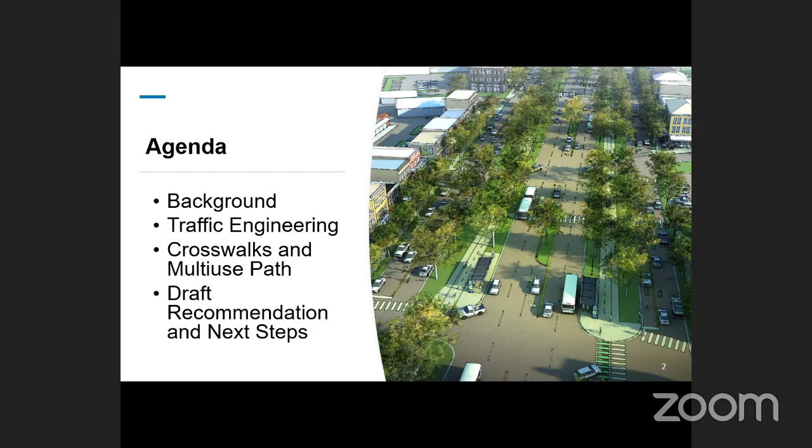And we spent the last several months working very closely with NCDOT, who, as you all know, owns this infrastructure. And anything that we do within this corridor requires their concurrence. So we've been working closely with them to get concurrence on our next steps. We'll talk a little bit about the crosswalks and the multi-use path that will be implemented as part of this project. And then, as the manager mentioned, while tonight we're just sharing information to get some feedback, we do plan to return to a June council meeting and ask for concurrence on a draft recommendation. And we're going to share that recommendation with you this evening.

So just as a reminder for this project, this is one that we've been working on for some time. It originated in 2011 when the alternatives analysis was initially approved. In 2012, the Chapel Hill 2020 plan was adopted and included the NSBRT project in that. The original locally preferred alternative was approved by council in April of 2016. And then we were approved to enter into project development, which is the first step in the federal funding process, in November of 2016. In January of 2019, council adopted an updated LPA.

The Federal Transit Administration, or FTA, reviewed that in February of 2019, and they asked us at that point in time to identify a final LPA. And what they meant by that is that the LPA that was originally adopted said there was a convert or construct option in several sections of the corridor, and they need us to confirm whether we're going to convert or construct or a combination of both. We need to tell them what that is before we can continue to move forward in the federal process.

So in October of 2019, we provided an update to council, as I mentioned earlier. You all had some questions, and we're prepared to address those this evening. And then in February of 2020, FTA released their new starts, small starts ratings, and our project, along with the project in Raleigh, were rated, and we received a medium rating, which allows us to continue in the FTA funding process. So just a reminder of the context and vision is why we're undertaking this project and why we've been working on it for 9 years now.

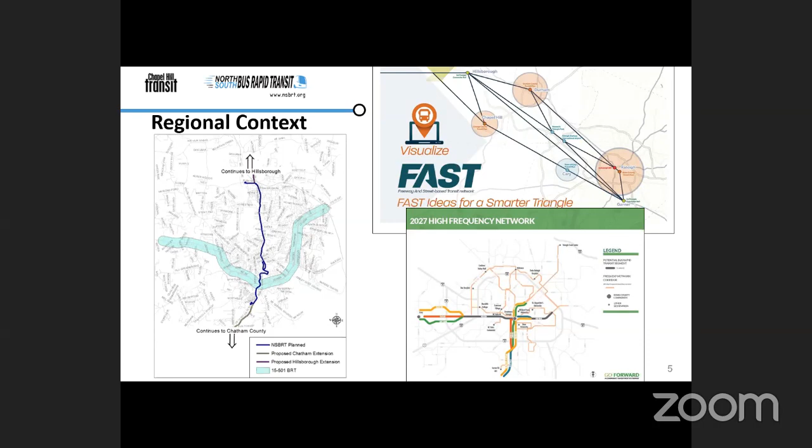Until we have the LPA, we've paused that work because we don't want to spend a whole lot of time working on those things until we have a defined LPA and we know that FTA accepts that LPA. So we don't think it makes sense to spend a lot of resources working on that until we have concurrence from FTA on our final LPA. Once that happens, then we potentially could move into engineering, and once we moved into that, we potentially would be at a place where we could compete for some funding that would be available, as the mayor mentioned earlier, for shovel-ready type projects. So we're about a step away from where that's at.

Under the current scenario, and this all could change, both because of funding at the federal and state level, but our earliest construction would begin 2023 with potential implementation in 2027. Again, that's assuming a traditional funding approach. If we become eligible for and additional stimulus money becomes available, that could potentially be expedited. But as of now, we're looking at 2027 before we implement our first BRT line.

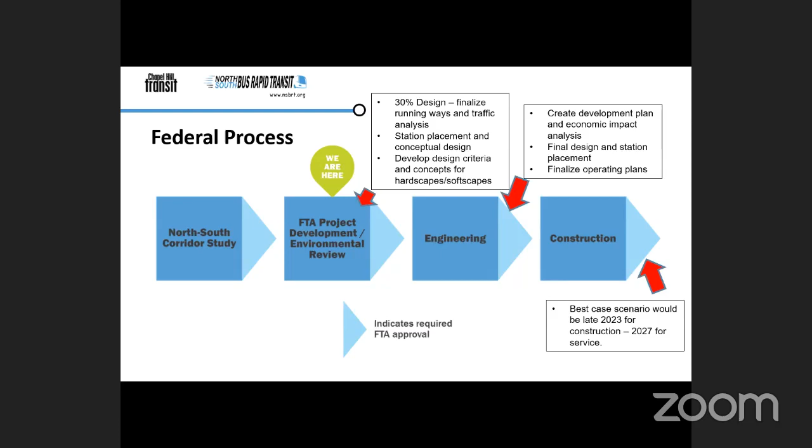So the locally preferred alternative, again, just want to share some context in this regard. It's a general description of the type of transit service that will be used within the corridor. So in this case, bus rapid transit, that's been decided, and there's been consensus on that for some time. The running ways are identified. We've had previous conversations over the years about, should we be center running or curb running or median running? We've identified and selected the curb running for the corridor. What's left to be determined is, are we going to construct lanes or are we going to convert lanes? It also includes the alignment and then the beginning and the end of the route.

As an important reminder, the LPA is general. So specifics, such as specific locations for stations and engineering and those sort of things, happen as we move into engineering and future planning phases. So while we've got a general sense of where the stations will be at, they are nowhere near locked in at this point in time. The LPA is important because it's a critical step in the funding process. It tells the Federal Transit Administration what alternative we're going to be pursuing as we pursue local, regional, and federal funding. And importantly, it can be adjusted through the environmental or NEPA phase and also through the design phases.

So for example, if we decided, as we have, that downtown would be a dedicated convert option. As we go through engineering or the environmental engineering, and we decide as a community and as a council, well, the convert option just isn't going to work through downtown. As long as we haven't made a submission for federal funding, we can adjust that, and we can do that in other areas of the corridor as well. So again, I think we'll be talking through some of those options with you.

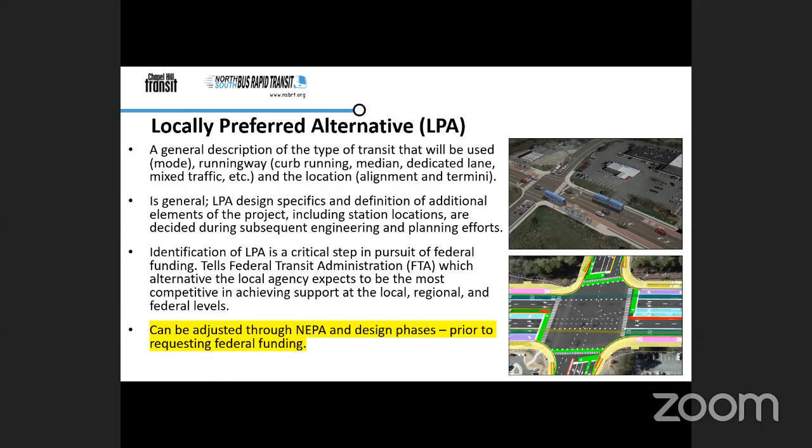So with that, our next steps for the LPA: the Transit Partners Committee has approved the updated LPA that we'll be hearing about tonight. We'll have the presentation this evening, and then we plan to return either to the June 10th session or the June 24th session of council to seek final approval of the LPA.

So with that, I will turn it over to Kevin Bauman with Kimley Horn, who is our traffic engineer. He'll provide an update on the traffic engineering, and then following him, Julius Superock with AECOM will talk with you about the pedestrian and bicycle infrastructure, and then I'll return with a quick update on the final LPA. So with that, I'll turn it over to Kevin.

Thanks, Brian. Can you hear me? Yes, we can hear you.

Okay, wonderful. All right, so we're going to start our traffic discussion with a quick recap of the information we've shared previously, and talk through the areas of the corridor where we have been evaluating alternatives and really just share what we found in terms of traffic impacts. And then lastly, we'll share some data we've collected related to the types of trips on this road and try to answer this question of whether folks on this road are primarily local or through trips.

So we've shared some of our analyses with this group previously. We looked at several different options for convert and construct on the corridor using both existing and future traffic. And based on those analyses, we're recommending to construct on the northern end of the corridor from Eubanks to the Umstead Drive area, as well as the southern end of the corridor from NC 54 down to Southern Village.

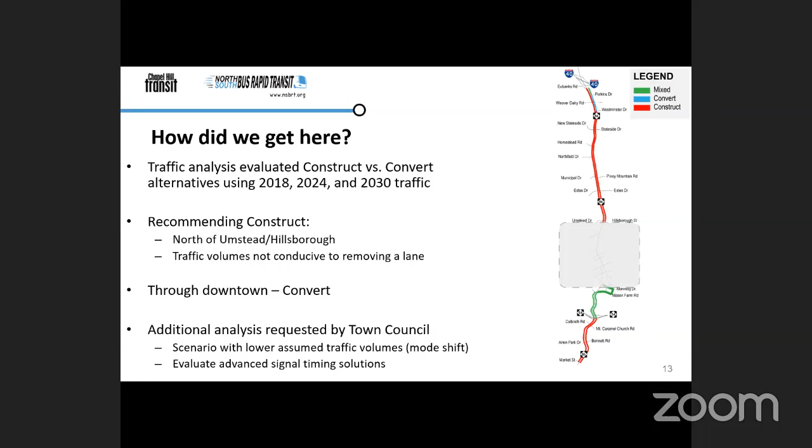One quick note relative to that picture I just showed you: there's one portion of the corridor in that northern area where we're actually proposing to convert an existing lane. That's because it currently has three northbound travel lanes and has enough capacity to handle that traffic with just two northbound travel lanes for vehicles plus a bus lane. So that's the one exception to the rule north of the Umstead Drive area where we are proposing to convert. Really that's just an effort to reduce the cross section of the road and also maintain uniformity in the cross section along that stretch.

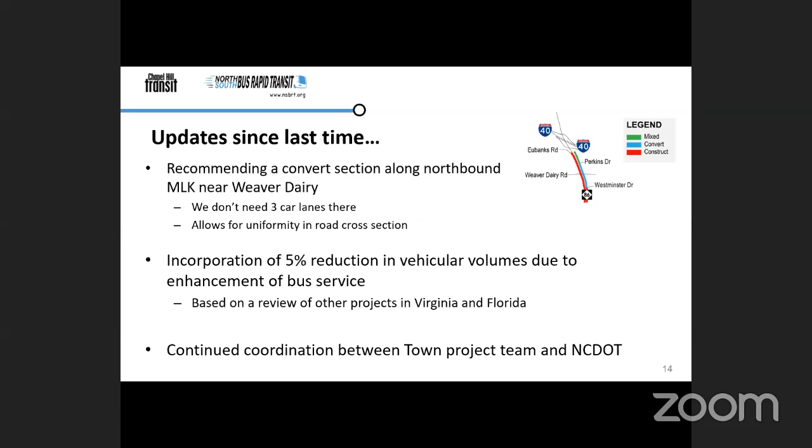Lastly, we've had a lot of regular coordination with NCDOT since we spoke with this group late last year. Their staff has been able to review all of our analysis and in general has concurred with the conclusions that we're going to be sharing today relative to these alternatives.

So for that gray box in the middle, we looked at three different options for the cross section in downtown, where the traffic volumes are lower and where it's really not feasible to increase the footprint of the road from an impacts standpoint.

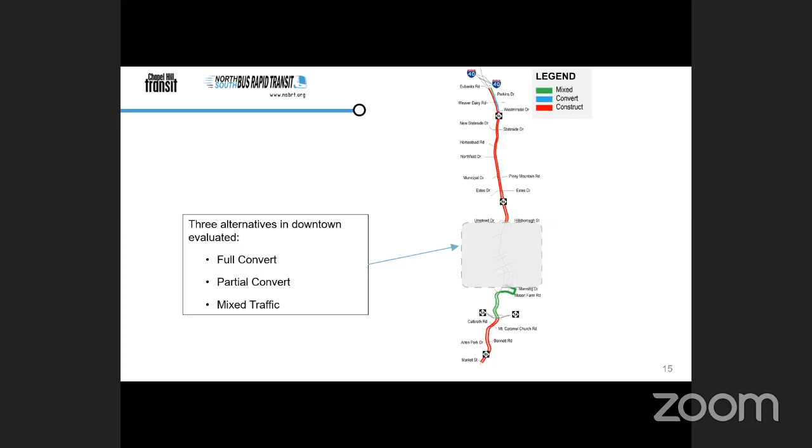We looked at two different convert options and one which would just have the bus operate in mixed traffic like it does today. The first alternative, which we're calling full convert, would convert a lane to bus-only along the entire stretch from Umstead Drive to Manning Drive near the UNC Hospital. The second alternative, which we're calling partial convert, is essentially the same as full convert, except for a section of mixed traffic operation in the vicinity of Cameron Avenue downtown.

So let's take a look at how the travel time numbers compare between these alternatives, starting with buses. Regardless of the downtown treatment chosen, there's a notable improvement projected for the buses over the current condition. There's not a substantial difference in travel time between the convert, partial convert, and mixed traffic options downtown from a bus perspective.

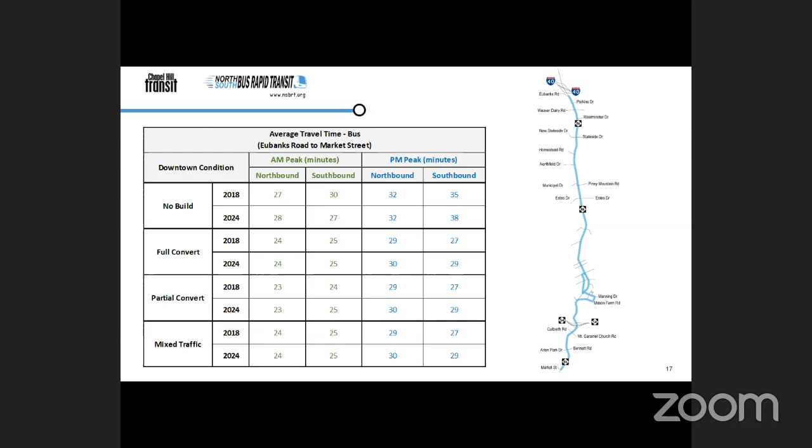Now, when you look at travel times for the general purpose vehicles, in general the travel times are comparable. You see a slight improvement in travel time for the mixed traffic scenario versus the two convert scenarios, which isn't a huge surprise. That difference of essentially keeping the lanes like they are today saves about a minute of travel time on average for cars through downtown—essentially the longer delays and queues you'd expect to see at those downtown intersections are adding about a minute of travel time on average.

Now, one of the many metrics we looked at in terms of expected vehicular operations is level of service. I'm sure many in this group are familiar, but the letter grades you see here in this table are just like school, where A is the best and F is the worst.

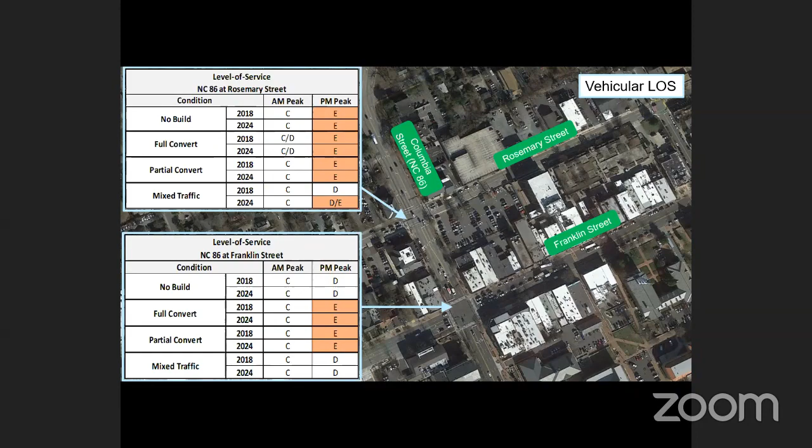Here's a look at how the level of service results compare between the alternatives at Rosemary and Franklin Street, those two intersections downtown. The boxes highlighted in orange are usually the letter grades we like to avoid, but as you probably know, there are certainly some intersections on this road that already operate in that orange range today. You can see that the two convert options are expected to create longer delays in general than just operating the bus in mixed traffic, but it's not a drastic enough difference in delay that we would be uncomfortable with recommending the convert as a viable option through this area.

One thing we did want to highlight is that if the town were to convert through downtown, this is the area with the greatest potential for some longer vehicular queues, really because this area would be reduced to a single lane. There is an existing pedestrian crossing near that blue arrow on the screen near Fraternity Court, which in this scenario, if we were to convert, has the potential to have some increased interactions with cars.

So back to the level of service information, this time down at Columbia and Cameron. You can see there's a more noticeable delay difference between the full convert and the other options. Taking the full convert would take that intersection from a level of service E today right to that kind of E/F range, right on the edge of those two thresholds.

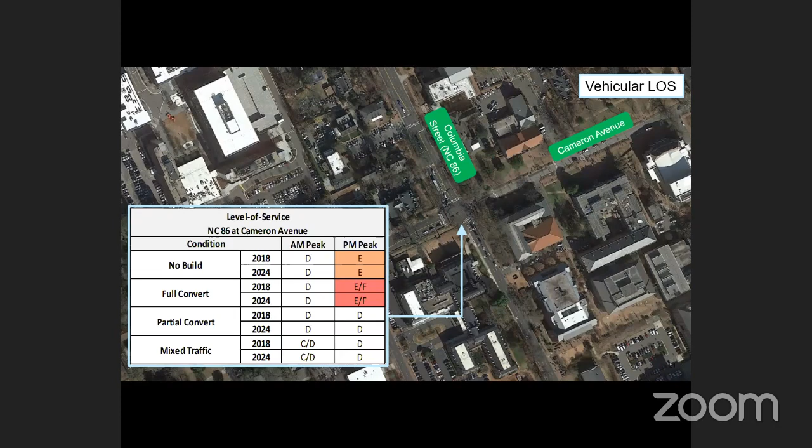The way the signal runs today, I'm sure for folks that have driven through this area, the first phase that happens is southbound Columbia Street goes, followed by northbound Columbia, indicated by the blue arrow on the picture, followed by the movements on Cameron Avenue, followed by an exclusive phase for pedestrians to cross in all directions.

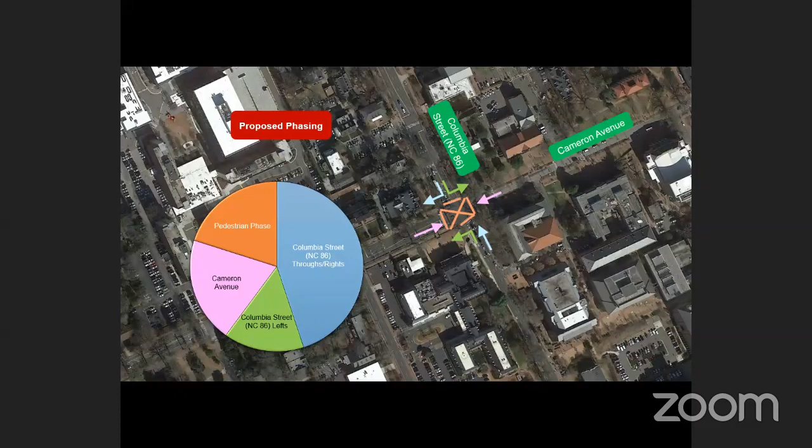So we would run those two movements together, followed by the left turns on Columbia Street, followed by the Cameron Avenue movements, and then followed by the pedestrian crossing, just like we have out there today.

So just to hit on the major takeaways downtown, we think either the convert options or mixed traffic could be viable choices from a traffic perspective, as long as some of those signal timing improvements I just talked about are incorporated into the design.

Ultimately, the final chosen alternative is something that has yet to be selected and really should be considered based on whether there's a strong preference to maintain that consistent cross section through downtown, and whether the town is comfortable with the drop-add nature of what the partial convert would bring to this project, as well as whether there's a preference to make operations slightly worse for vehicles for the sake of that benefit of the consistent cross section and having that consistent lane through downtown.

Because I'm sure many of y'all have driven through this area and experienced the challenge of driving in that rightmost lane today, where the buses are stopping pretty consistently through that area. It's really not a fully usable or utilized lane for vehicles, just because of how heavy and consistent the bus traffic is through that area. So the full convert would really be an attempt to clean that up, make it clear, and really delineate which lanes are intended to be used for buses and which lanes are intended to be used for vehicles.

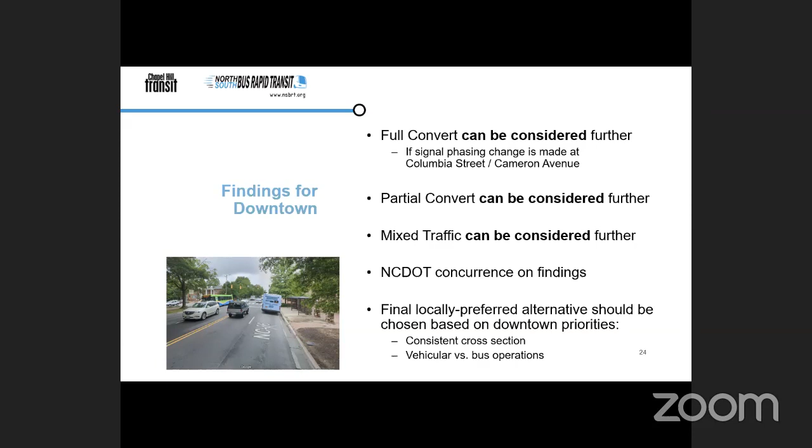Here's a concept of what an outside running bus lane might actually look like downtown. This is right at the intersection of Columbia and Rosemary. So just to get everybody oriented, in the top right corner of this photo where my cursor is, that would be north, and down here in the bottom left would be south. Franklin Street is just off the picture, on the left side.

Note that in situations where there isn't a right turn lane, folks making right turn movements will still make those movements from that outside lane. They would make a lane change movement to get over into the bus lane at the intersection and make a right turn. Now, for locations where there is an exclusive right turn lane, for example the southbound direction at Rosemary, vehicles would cross over the bus lane somewhere upstream and then make a right turn movement at the intersection, just like they do today.

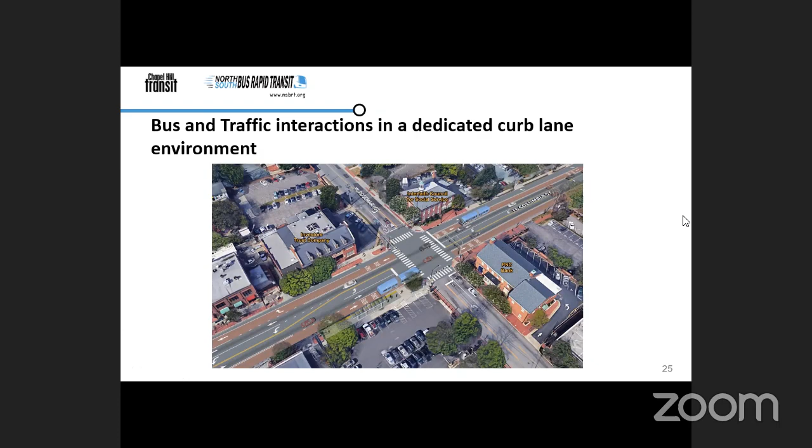Here's another example up at Hillsborough Street. This is kind of in that Midtown Market shopping center area.

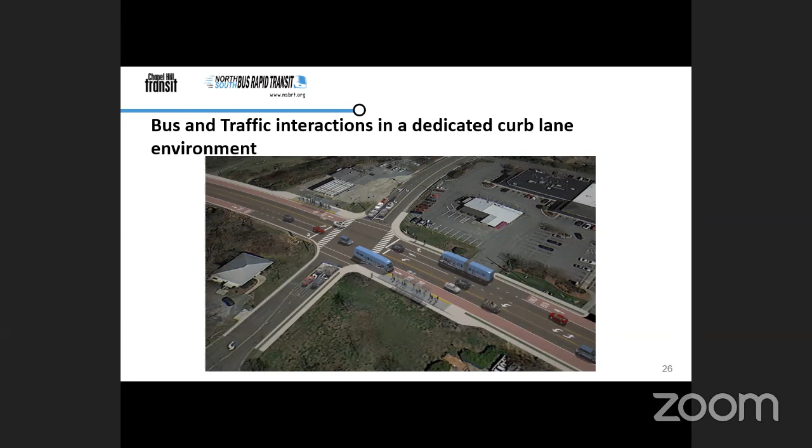All right, so let's switch gears a little bit and talk about some data that we collected on travel patterns in the area. The avenue that we chose to use for this was Streetlight. Streetlight uses location-based information from phones to give you information about travel patterns, and they buy it directly from the cell phone providers. We identified some locations along the MLK corridor, and we asked Streetlight to tell us about the destinations of folks that drive through certain spots. So it can help you figure out how far people drive on the corridor, as well as some key destinations for folks in the area.

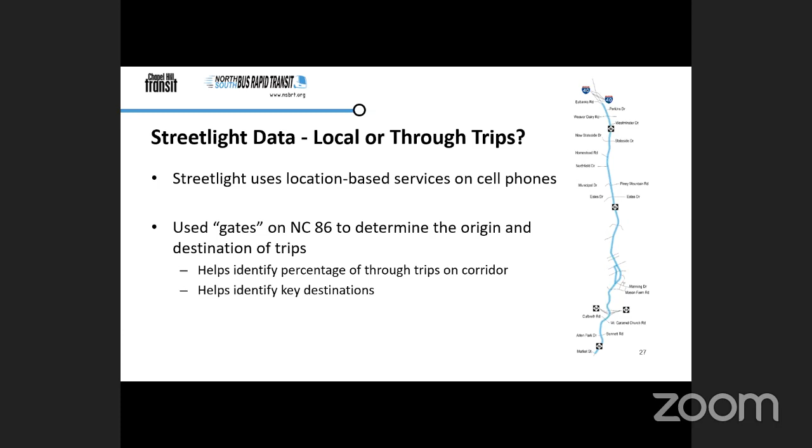So in terms of this question of how far are people driving, take a look at the graphs. The one on the left is a typical morning peak, and the one on the right is a typical afternoon peak. If you look at all of the cars that enter into the corridor from the NC 54/15-501 interchange, which is the bottom part of that picture where the yellow star is, about 40% of them have dropped off the corridor by the time you get to the hospital area. By the time you get through downtown, more than 90% of those folks have dropped off in the morning peak. In the afternoon, there's a little more through traffic through downtown, but it's still a fairly small portion of the overall trips. The high level takeaway we found from the data is that less than 5% of the traffic is driving this corridor all the way from one end to the other.

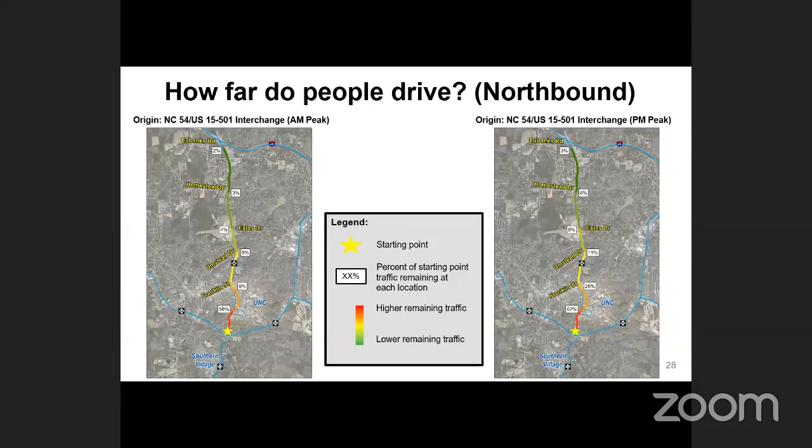So let's take a quick look at the other direction. This is looking at trips that start up at the Eubanks Road / I-40 area, where that yellow star is in the picture. You can see that very few of them are making it to downtown, and even fewer are driving all the way through the corridor. So fundamentally, this is telling us that the data suggests that the majority of the trips on this corridor are local rather than folks driving all the way through. It's important to keep that in mind relative to the traffic impacts that we're discussing.

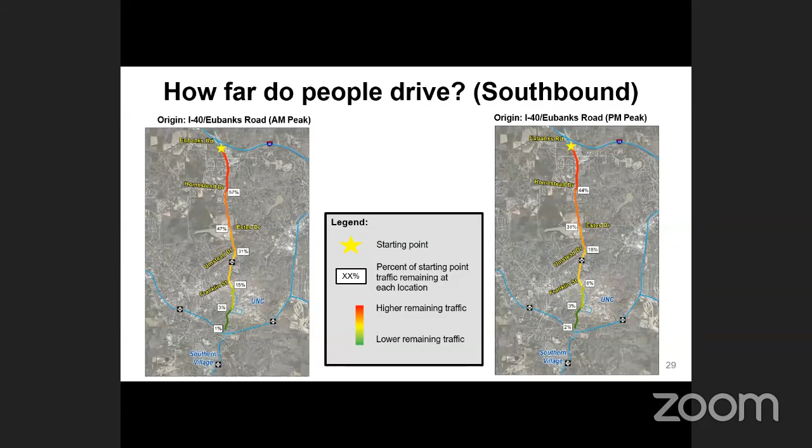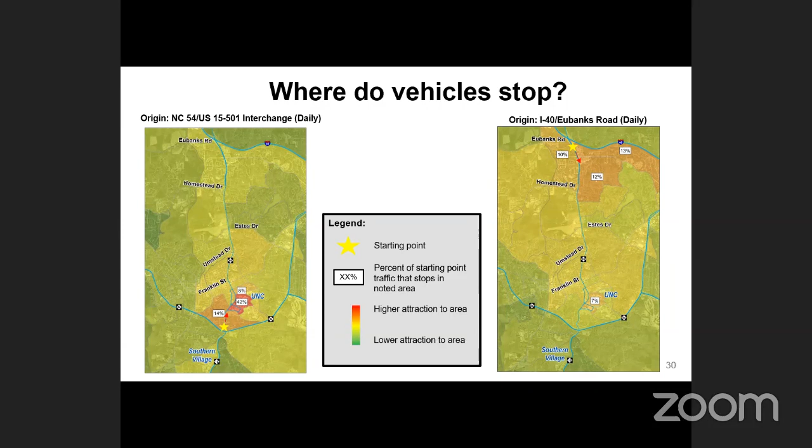Given the trade-offs we've laid out relative to these alternatives, the project team's recommendation is to carry forward the full convert through downtown as part of the LPA. Brian, Matt, the technical committee, and other stakeholders have looked at these options, and their recommendation is that a clear delineation of separate bus and vehicular lanes downtown will be the best option for this area in terms of the draft LPA. Brian's going to summarize this as well as the rest of the draft LPA recommendation in a second.

But first, I want to turn it over to Julia to talk a little bit about some of the pedestrian and bicycle improvements that are being completed as part of this project. Julia?

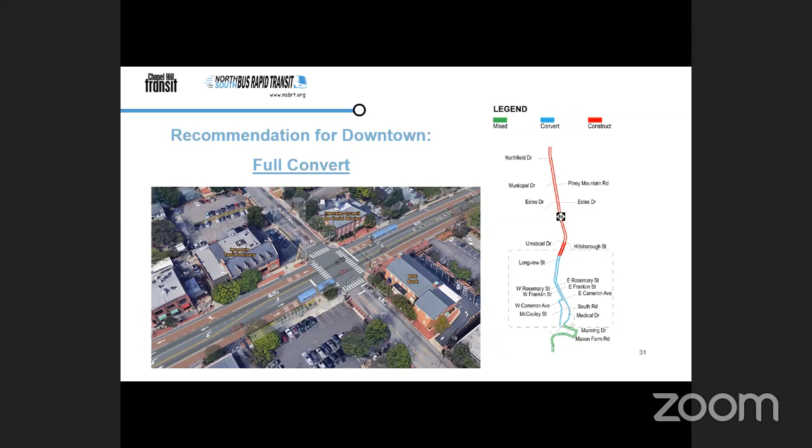Thank you, Kevin. I'll be talking about the crosswalks and multi-use path portion of the presentation. As part of our design of bus rapid transit, we also want to think about that active transportation component. One concern we heard was that crosswalks might be getting longer based on the dedicated guideways we're looking at for the BRT. So Jeff Kuntz and our engineering team did some measurements and consolidated everything into this table.

On the top row are the crosswalks along the north-south BRT route — these are the crosswalks that you drive through. On the second row we looked at the side streets, the crosswalks running parallel to the corridor. So if we're looking at crosswalks on the route...

We're suggesting an increase from 48 crosswalks currently to 57. They currently average about 70 feet in length, and based on our current design plans would increase to about 71 feet. As you can see in the far right column, 38 will see no change at all, 5 are increased, 5 are reduced, and there are 9 new designated crossings at signalized intersections. So the vast majority of crosswalks along the route itself will see no change.

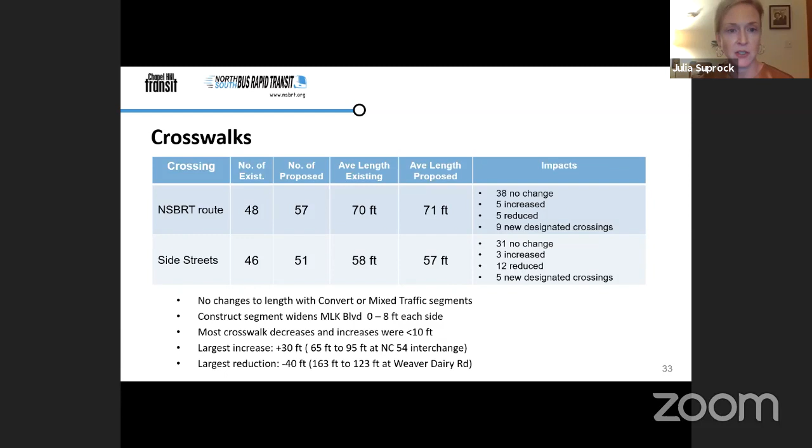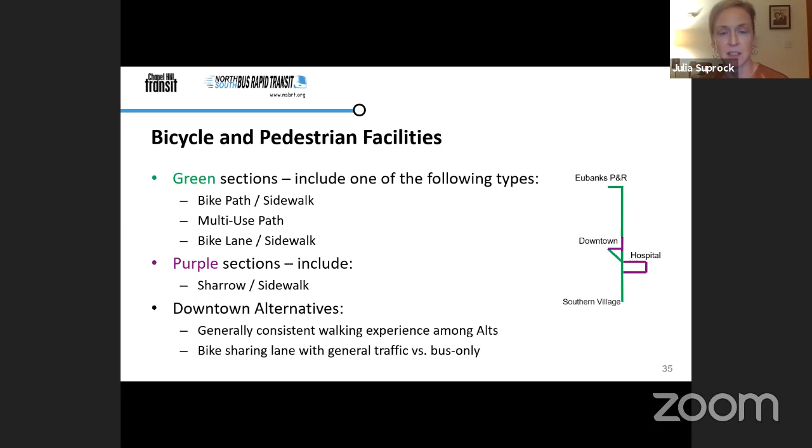So with the downtown alternatives, there's generally a consistent walking experience among the alternatives, so that's not really a differentiator. Again, just the idea of maintaining existing conditions.

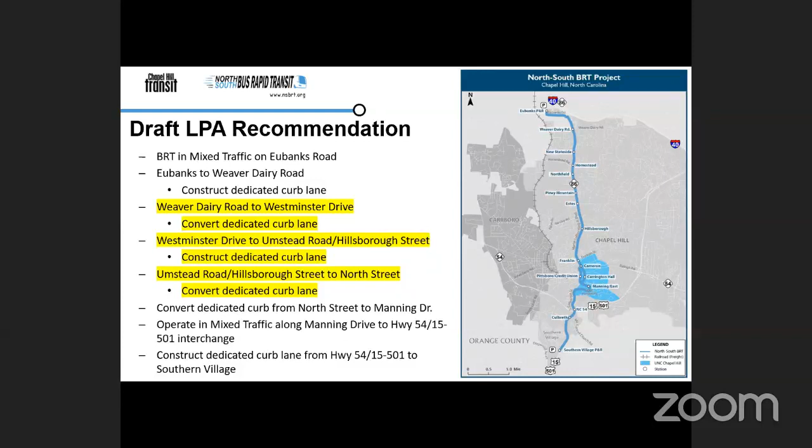Yeah, okay, I don't know if that's gonna impact the design decision going through downtown, but it looks like it's gonna be a lot of traffic and a lot of impact. So the sooner we can loop that in, the better. Thank you.

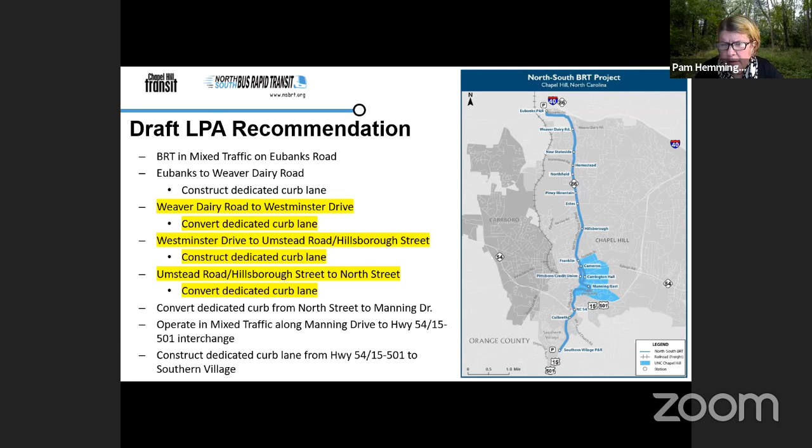Alan, followed by anyone else? Michael, I don't see you on the screen. Hang on. I'm assuming you have a question. So Alan, followed by Michael. All right. So I've got two questions.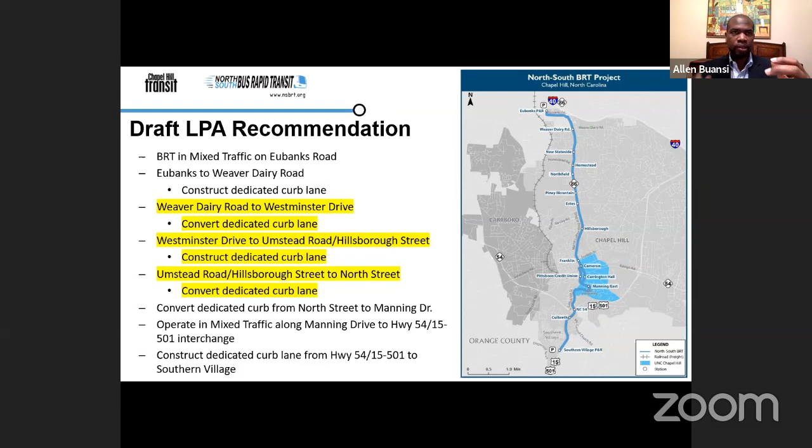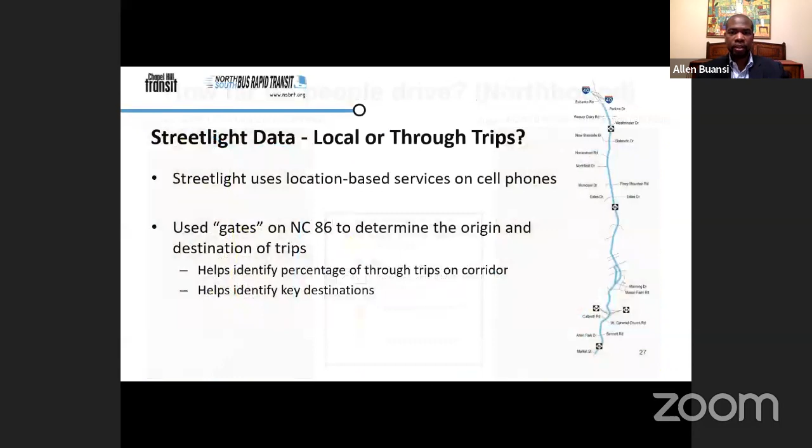So my first one is about the partial convert scenario, particularly coming southbound. There's a diagram that showed in that scenario, partial convert, a bus only lane converting to mixed traffic. And I think that line is designated by the different colors, blue and then green.

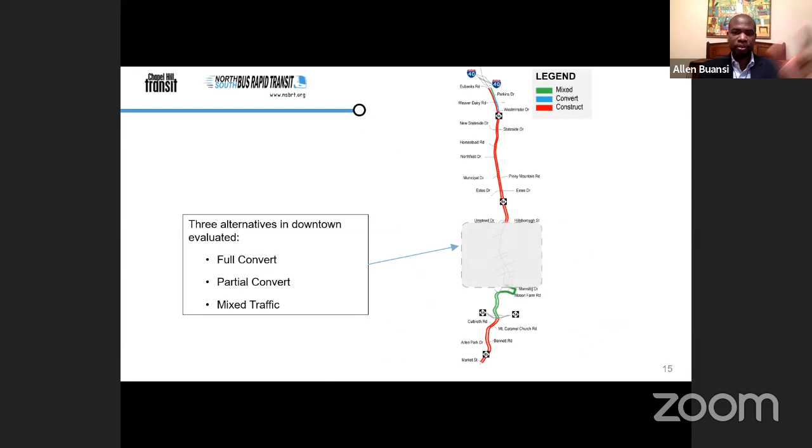I'm wondering at what point between Franklin Street and South Cameron Avenue would that bus only lane go into mixed traffic? I hope I'm making sense there. Yes, that makes a lot of sense.

So the way that would work is it would likely be at some point mid-block between Franklin Street and Cameron Avenue. So the bus lane would continue up to a certain point, and then it would drop in a similar way to how it would work at some intersections where the bus lane drops into a right turn lane, at which the regular vehicles could get into that lane to make a right turn at Cameron. So that's how we've been modeling it and thinking about it to this point.

Got it. Yeah, and this goes in line with what you were saying during the presentation, but I'm thinking that, especially for folks coming in from out of town, there might be some confusion for drivers in terms of when they can get over to the right, into that lane. And I think you had mentioned the importance of clear signage at that point. But yeah, I appreciate that clarification.

Then similarly, in the northbound direction, you have a similar challenge where you'd have a bus lane leading up to Cameron Avenue, and then you would allow vehicles to use both lanes through that core portion of downtown. But it's a challenge to let people know, hey, by the time you get up to Rosemary, it drops and becomes a bus lane again. So that is the confusion that could result from an alternative like that. And that was the hesitancy in recommending it.

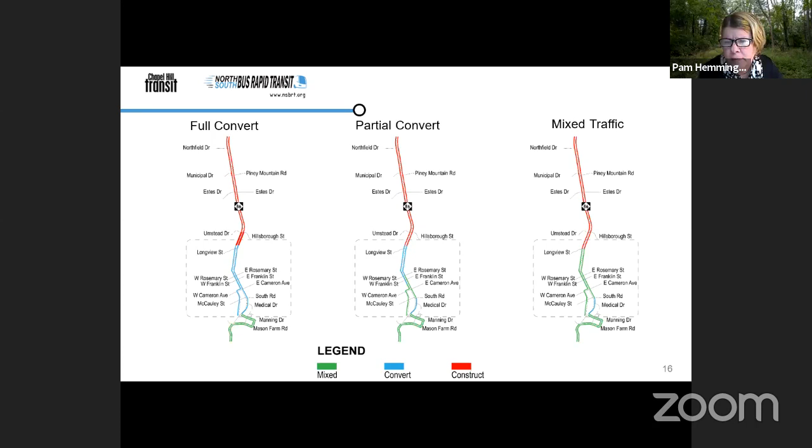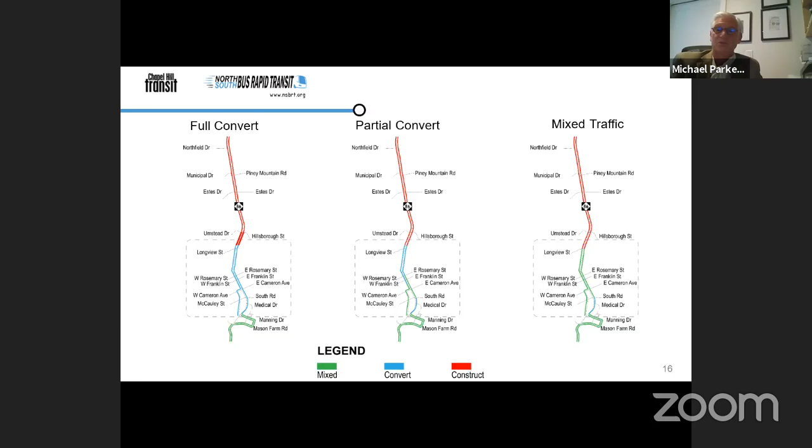Thank you. Thank you, Michael. I don't have any questions. I can make some comments if you'd like. Yes, please. So a couple of things. First, I want to thank the team for getting us this far. We're getting so close to a BRT, I can practically not smell the diesel fumes because it'll be electric. But I'm really excited about this. And as I never miss an opportunity to brag on ourselves and brag on Chapel Hill Transit, if we are successful in getting this funded and built, we will be the smallest town in the United States with a BRT. So again, just one more way that we continue to punch above our weight.

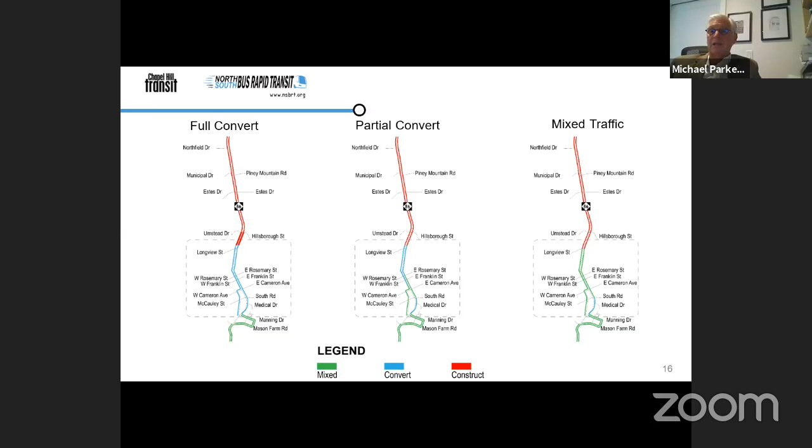The other thing, I think Brian was being very polite and alluding to this earlier, but we really need to start making faster progress on this for two reasons. One, Brian talked a lot about Raleigh and where they are. They've already gotten to 30% design. And while theoretically it's not a competition, in practicality, it probably is. So we have to make sure that we don't lose our place in the queue. Secondly, if what happened in the last recession, 08, 09, happens again, and there's an infrastructure component to some stimulus bill, they're going to be looking for shovel-ready projects. So it really behooves us to move this along as quickly as possible so that we can be shovel-ready. If there is stimulus money over and above the normal allocations for the federal Small Starts program, we want to be able to avail ourselves of it.

We got that kind of funding for our fiber optic and for our traffic signals in 09. An armory was built in Raleigh with that money because it was shovel ready. So I think it's really important that we make our decisions quickly and move this along as quickly as we can to really maximize our chance of getting this funded. We've done so much great work up till now. It would be a real shame if we can't push it across the finish line. Thank you. Okay, anyone else?

We need to move along. We have some time constraints on our other items. You can always send your comments in to Brian Litchfield and team. But I also appreciate the work that's been done to further dive into the details on this. And you listened when we asked that we don't want you to widen any of our curbs, since we felt like we were pretty wide across that whole corridor. And I love all the extra crosswalks. I think that's going to be huge and important. I know there are some constraints on this plan because of the narrowness of downtown and the number of pedestrians. I think you've done a really good workaround on that too.

All right. Do you have the information you need from us, Mr. Litchfield? We do. Thank you. And we'll see you hopefully sometime in June for a final decision on the LPA. So thank you all. Thank you. And make sure you post this for the public and let them know they can make comments, because we're not taking a vote tonight. We're just making comments. We will vote in June at the meeting. So thank you. All right, we're going to move to our next topic, which is the East Rosemary proposed parking deck. Mr. Jones. Thank you, Mayor.

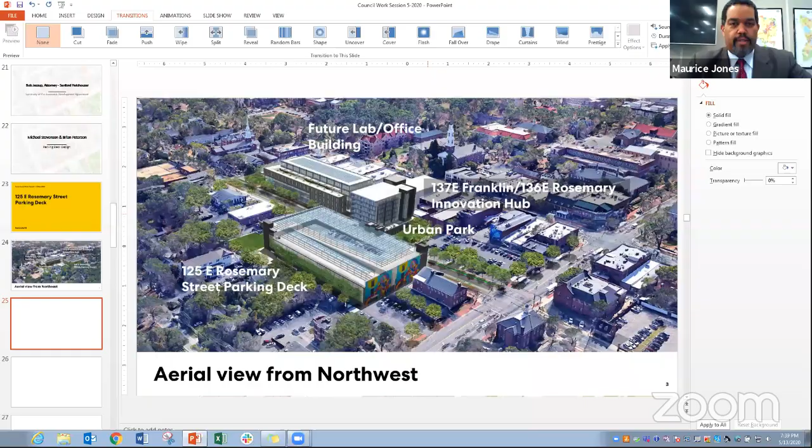We are offering now an update to you on the East Rosemary Street parking garage / Grubb Properties office building proposal. I'll provide a general overview of the proposal. The town would exchange the Wallace parking deck and land on East Rosemary Street for the 125 parking deck. It's also known as the CVS parking deck, which is owned by Grubb, and any adjacent properties that are needed

to build the garage. If approved, the town would build a new parking deck on that parcel consisting of approximately 1,100 parking spaces. 100 of those spaces would be reserved and paid for by the University of North Carolina to support its new admissions building in downtown, and 250 spaces would be reserved and paid for by Grubb Properties to support their projects along East Rosemary.

And if approved, Grubb would in turn construct a new wet lab and office building of approximately 200,000 square feet with a projected value of about $80 million. And there would also be an expectation, of course, that hundreds of new jobs would be brought into our downtown, creating some new vibrancy in our downtown, especially on the eastern portion. So with that, I will hand over the presentation to Joe Dye from Grubb Properties.

Joe, you with us? I'm here. I'm waiting for, I think, Amy to turn my video on, but I can go ahead and get started. We also have Clay Grubb with us as well, folks. So we'll hear from him as well. Yeah, so good evening, Mayor Hemminger and Council. Pleased to be with you all tonight. As Mayor Hemminger noted, Clay Grubb is with us tonight.

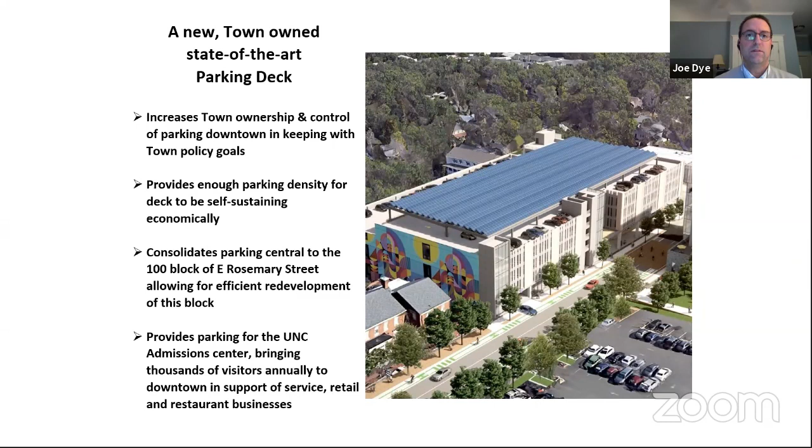And then finally, the design has continued to evolve for the parking deck. And I know a lot of you have seen that. There's a 30-foot OWASA easement on the east side of the deck. And we're viewing that as an opportunity for a linear green space. It's a pedestrian connection from North Street to Rosemary Street, and then of course linking to downtown, as well as a pedestrian connection for folks coming down the back stairwell of the deck out to the public realm along Rosemary Street and other connection points from there.

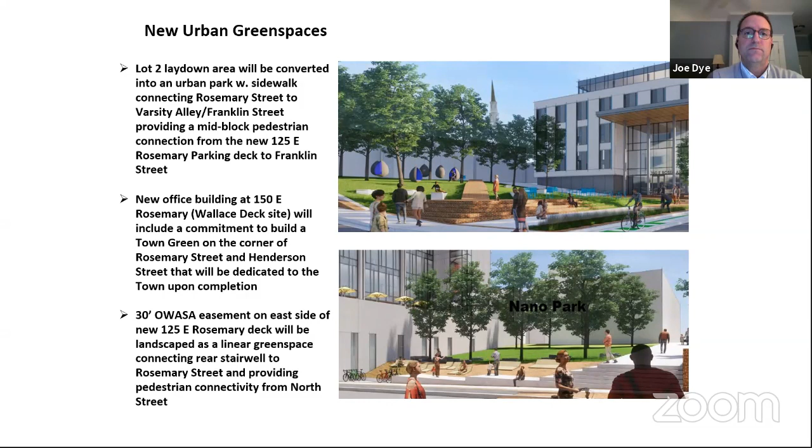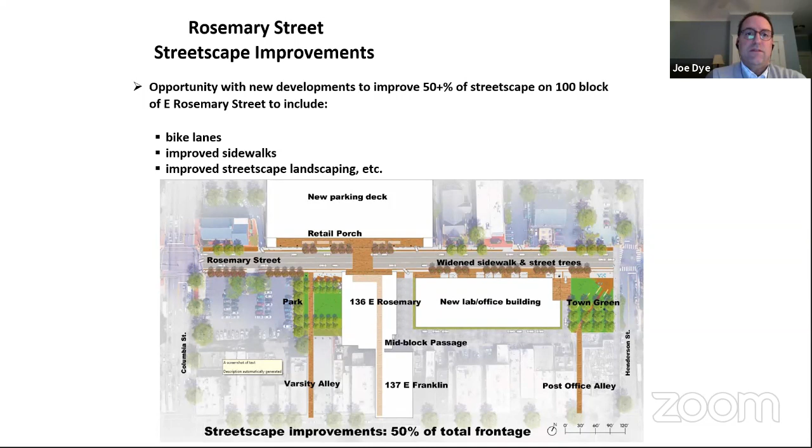That's in downtown, beginning with the meaningful redevelopment of 137, 136, and again, the new building. It's the opportunity for that new Class A office wet lab building, 6 stories up to 200,000 square feet. It's a substantial impact for the tax base for downtown, and we'll get into that in just a second. It's an attraction and retention of UNC and private businesses that brings hundreds of jobs to downtown, and that has a ripple effect on other businesses downtown. We have another slide that helps illustrate that.

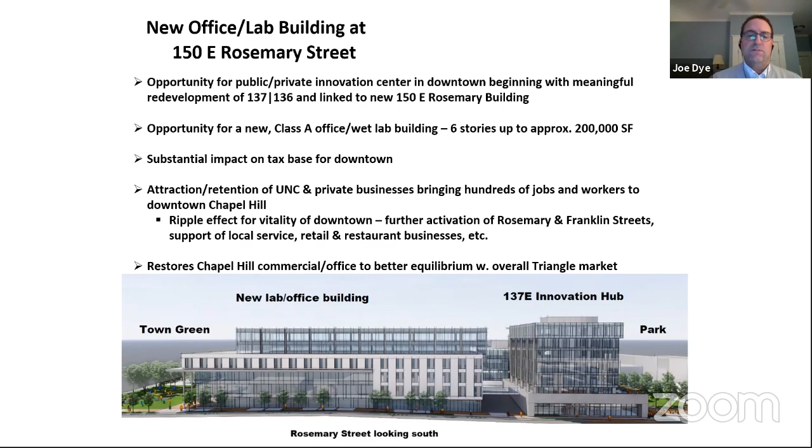And last but not least, this is real important because it restores Chapel Hill to a better equilibrium with the overall Triangle office market. It's something Dwight and I have talked a lot about, I know you all have talked a lot about, and Mayor Hemminger has been a great cheerleader for promoting Chapel Hill being open for business, and we want to help be part of that equation, bringing this much needed commercial space.

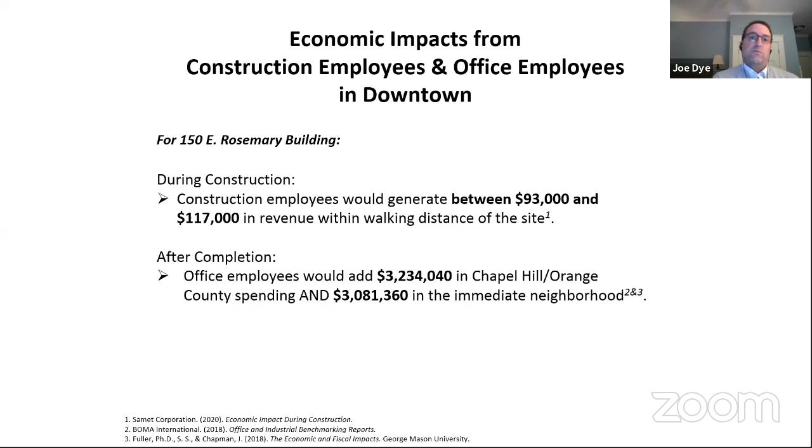And then after completion, those office workers, and this is cumulative, they would have an impact in Chapel Hill and Orange County with their spending dollars of a little over 3.2 million, and in the immediate downtown neighborhood of just over $3 million, which is a substantial impact to downtown.

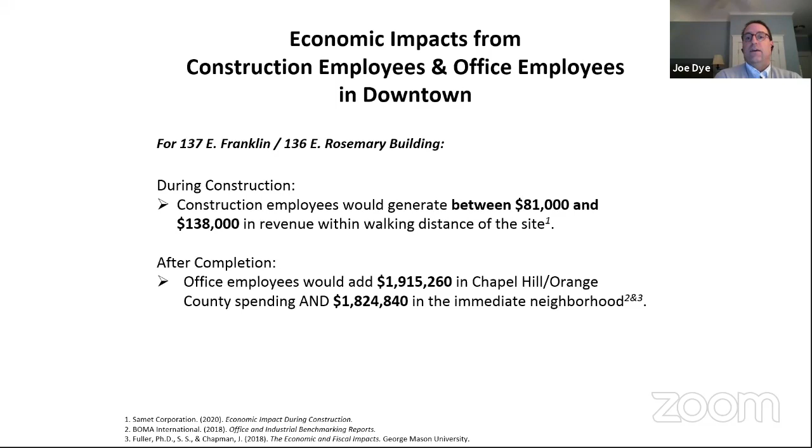And then similarly for the 137 and 136 East Rosemary buildings during construction, again, the construction employees would generate between $81,000 and $138,000 in annual revenue. And upon completion, the employees in that building would have impacts of a little over $1.9 million in Chapel Hill and Orange County, and a little over $1.8 million in the immediate neighborhood in downtown.

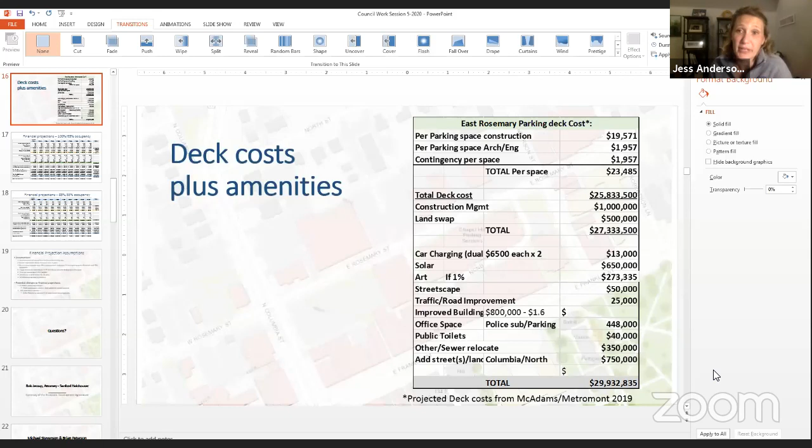I need it to be here, or there's nowhere else in proximity, or whatever that is. I would love to hear the justification, and maybe you'll get to the point where you recommend we don't do it here. I don't know, but it looks like it's about $500,000, so that's not everything, and it's not nothing. Right, so that would be great.

Yes, can I follow on that? I think, Dwight, it would be helpful, Amy, if you would break out parking office and police substation so we can see. I know building them together would reduce the overall cost, but it'd be nice to know we're not saying, nope, we can't afford 448, so you're not getting either. I think it'd be nice to break them separately, line item.

We've certainly got it broken out. It's about 170 for the parking office, and the balance of that 448 is police substation. So I think that's just helpful. Yeah, that would be helpful - square footage, what square footage you're thinking for each one, just in a parenthesis or something. Well, that's in Michael's design presentation also. Okay, and then you may recommend that we do one and not the other. Absolutely, I'm just asking for the justification for why they're there.

And then my last question is in terms of the maintenance commitment from UNC. If I'm remembering correctly, it looked like it was about $40,000 a year, with the first year prorated to half a year, so $20,000.

I'm just wondering, since I don't know parking decks, what does it mean that as maintenance costs go up over time, the $40,000 a year in the early years won't all be used, and then that gets pushed into later costs?

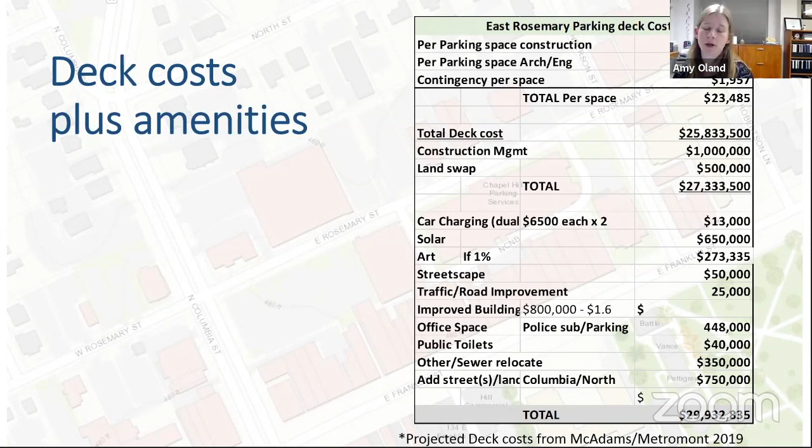Okay, thank you. And I want to add my thanks, this has been a really helpful way to see the numbers. This slide and the 30-year projection were really helpful. So thank you. All right, Ty, did you have something to share?

And then Allen? Yeah, Jess asked most of my questions, so I think I only have one left. The $1.3 million community benefit slide, is that already spelled out in writing in the economic development agreement, or will that be for the entitlement process?

You're going to be looking at the economic development agreement next week. That's not part of the deck numbers for tonight. They're still working on negotiations. They were just trying to present some things they were thinking about, and you're going to do a deeper dive into that next week. So Bob Jessup is actually here to run through the summary of the economic development agreement after this financial part. All right, bet. Thanks.

All right, Allen? So I had a question related to our discussion a couple of weeks ago about the deck, and just touched on this in talking about the parking office space and the police substation. But I remember during that discussion we talked about where in the deck we'd be interested in having those kinds of spaces, I think.

I apologize if I'm misremembering, but I think Karen had mentioned maybe if there's a police substation or parking office space, it could be to the rear of the deck versus the front of the deck. And I think we had asked about what kind of cost implications that might have in terms of where those kinds of spaces might be in the deck.

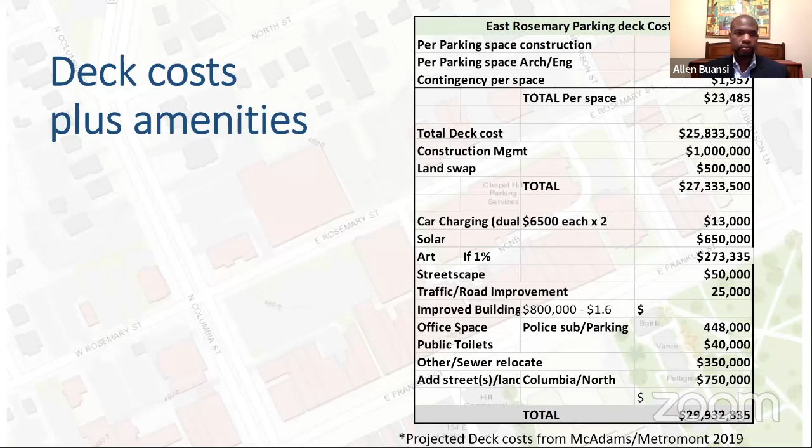Okay, I'm going to bring my comments and questions in, then I'm going to ask council to give some thumbs up, but I think I've heard from a lot of you on these topics already. I do want to say that this is much better. We're really working this together, and staff's been working so hard, and during a pandemic it's going to be even harder to work through all these negotiations when you can't meet face to face and you can't run numbers together. You have to run them separately. So I appreciate the flexibility and the due diligence, and also just the hard work that's gone into this.

I will say, I think we're going to have an unusual scenario coming up that's going to play interestingly, hopefully into our favor. If UNC opens up this fall, which is what they're trying to do, there is going to be a huge demand for parking. They have communicated that. They have many people who normally take our transit system who have some immune situations that they would prefer to drive and park if they're coming to campus. So it's going to be an interesting dilemma.

There's going to be a demand for parking, and UNC has expressed this and asked what we're looking at for that. Meanwhile, we're going to have a reduction of parking spaces for the first year because the deck will be torn down. So there'll be additional pressure for more parking spaces between the existing Wallace deck, and hopefully our staff's looking at offering some lease options to people in 140 West because it's underparked right now. And so getting some of those leases transferred over to 140 West pronto, maybe to start in August, as if the university's coming back in August, could play to our benefit for our entire parking enterprise fund.

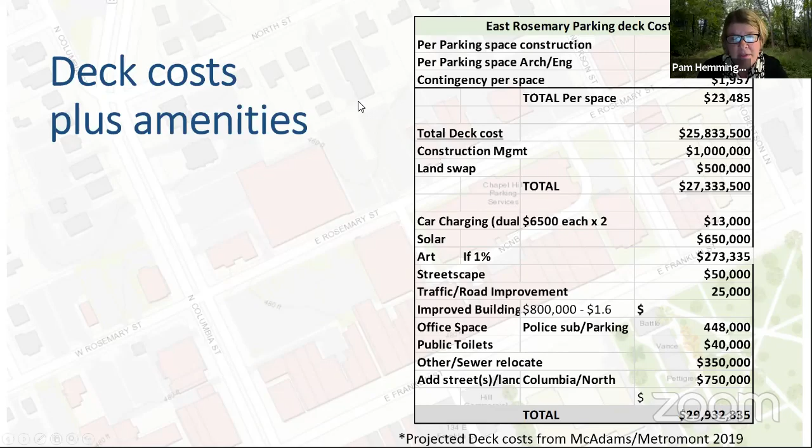All right, so we have a lot more of this presentation to go, and we have another item. I know this is important though, and you're going to revisit this next week, so don't think this is your only opportunity. We're just getting information tonight, and you can always send more questions in to our staff. So I'm going to turn it over to Bob Jessup now to go through the summary of the Economic Development Agreement.

We lost him. We're not hearing you. Well, I wasn't talking yet, so. Well, that's why. Okay.

I know that you have the summary in your packet. Just want to say this is just supposed to be an update and review of key provisions. And as we stated before, we're not asking for any particular action tonight. We just want to give you an update as to where we are and get council feedback either now or at another time. I'm not going to try to read this to you. Much of what's in here is what we have talked about before, and was in the letter of intent, and we've carried it through. Just want to hit a couple of high places where things have changed.

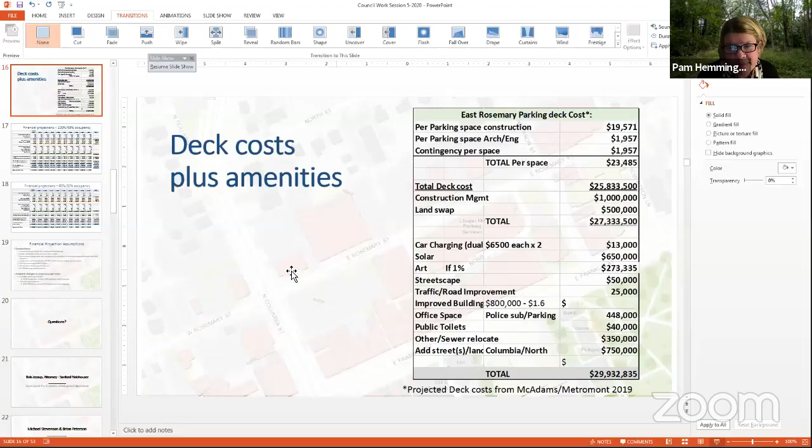Okay. Thank you. We still have a lot of the presentation to go, folks. Let's keep us moving along, please. Thank you. Again, you'll do a deeper dive on this next week. Bob, can you release your screen? Of course. Thanks, everybody. Thank you. Who's up next? Michael Stevenson and Brian Peterson. Thank you. Do you want me to share mine, or you want to drive it? I'll drive it. Okay, go ahead, next.

I'm going to try to focus on some of the outstanding items that were brought up at our last session. And by the way, good to see you all again. Good to be back. We've been going through the entitlement process with the other committees, CDC, and last night actually had the ESAB review, which was very good.

A number of people have mentioned they wanted to see the parking deck project in the context of a larger area, but also in the context of a larger development vision. So we've created these aerial views to show the bigger vision, how it fits into the bigger picture with the 136, 137, the parking deck, and the future lab office building, 150 East Rosemary.

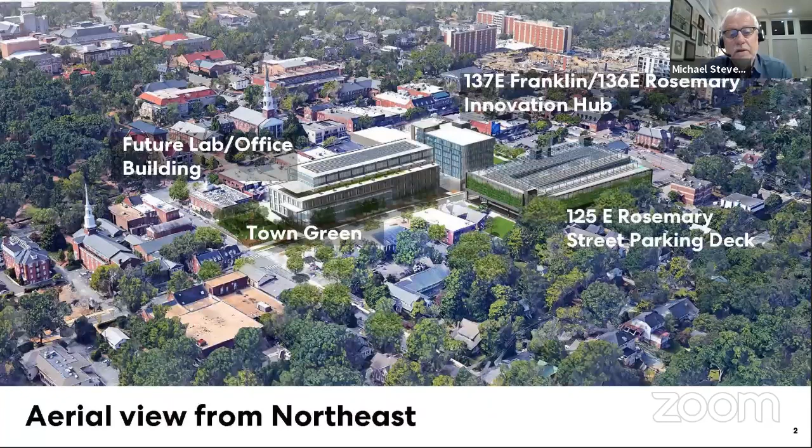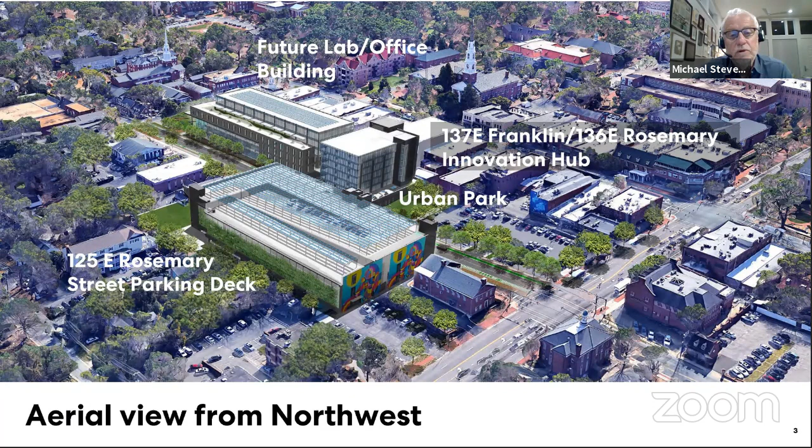Next, please. And then from the northwest, the view, and we're showing the PV arrays on the top deck of the parking deck, the potential entrances from Columbia and North Street, which we'll get into a little more detail later.

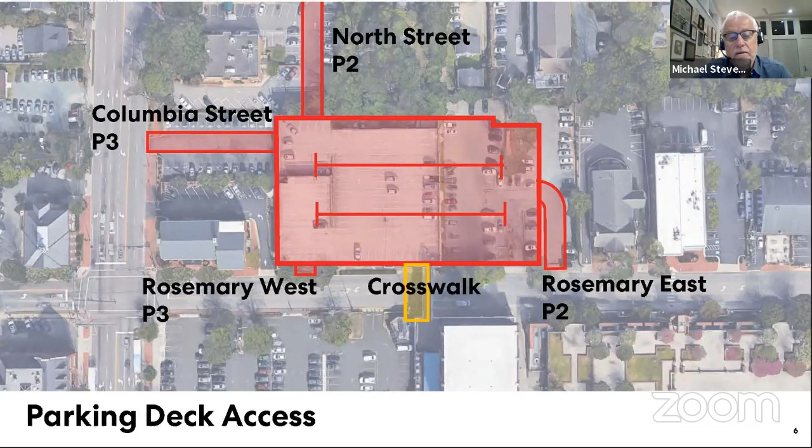One of the important things of these 4 access points has to do with how we distribute the traffic internally. And we have some topography here, the sloping of the natural grade and the streets, which we want to take advantage of so that we can load and unload the deck at multiple levels, which really helps the internal flow, getting cars in and out.

So starting on the right, Rosemary East, coming in at P2. By the time we get to Rosemary West, we're coming in on the 3rd level. Then the Columbia Street entrance is a typo, that's my fault. Columbia Street would be on P3, but it's at the back of the deck. And the North Street, also at the back or at the north side, comes in at P2. So we're giving a nice even loading of the deck on these 2 levels as cars come in and exit. Next, please.

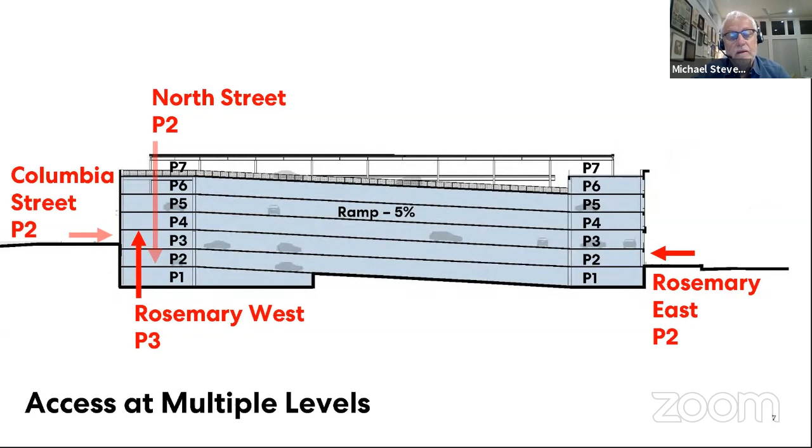So all this is in the context of, we want to make this a better street, and that means not just for cars but for everybody. So for people walking, on bikes, and so forth. And I know just from hearing all of your comments, this is a commonly held value and vision for this street, and we've heard it from all quarters. So we want to put the traffic flow in that context.

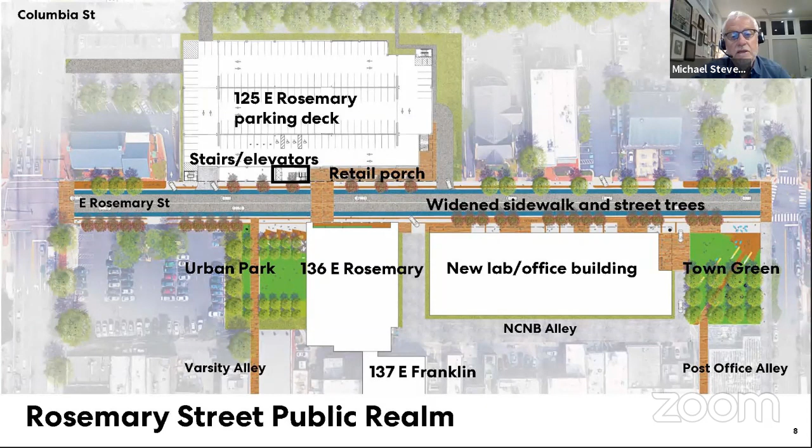So just think about all the things we've been talking about and looking at, and I want to go through a series of diagrams that just kind of explain our logic and our thinking about this. So this is the overall public realm diagram you've seen. Next, please. So we're kind of creating these 3 public spaces that we really think will be centers of activity and cool places to hang out and so forth.

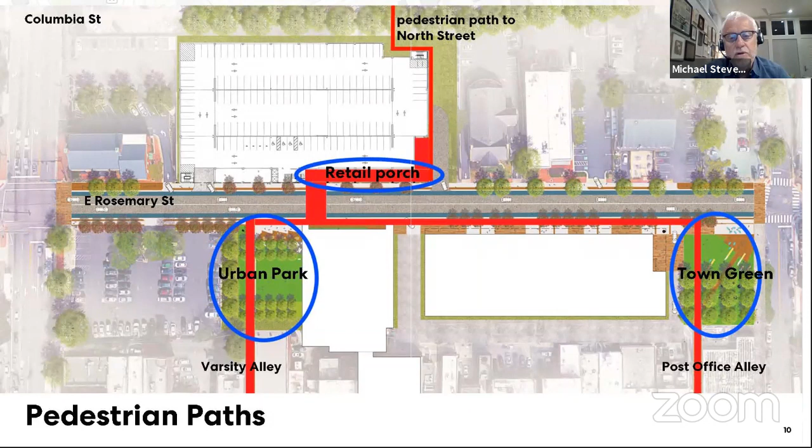Next, please. So that starts to create pedestrian desire lines where we think people are really going to be walking. Certainly we know already from Rosemary to Franklin on the alleys, and then crossing, coming back and forth from parking to this retail porch, east and west along the south side with these new and renovated buildings. And we're keeping the footpath to the north, going up alongside the sorority house up to North Street. So we really want to promote this idea of pedestrian connectivity.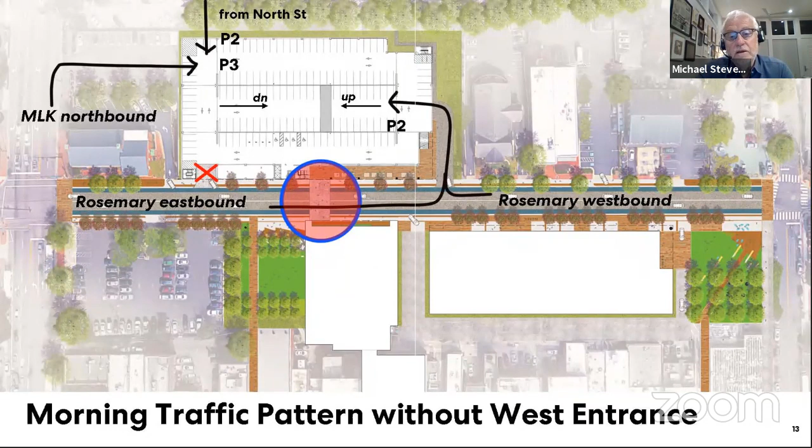Next, please. What happens if we close that Rosemary West entrance in the morning? Now all that traffic eastbound has got to drive all the rest of the length of that facade of the frontage, right in front of the retail porch, right in front of 136, and across the pedestrian crosswalk, and now make a left-hand turn, and you're mixing with the other traffic making the right in. And so we think that kind of exacerbates the pedestrian conflicts here, and also is less convenient for drivers.

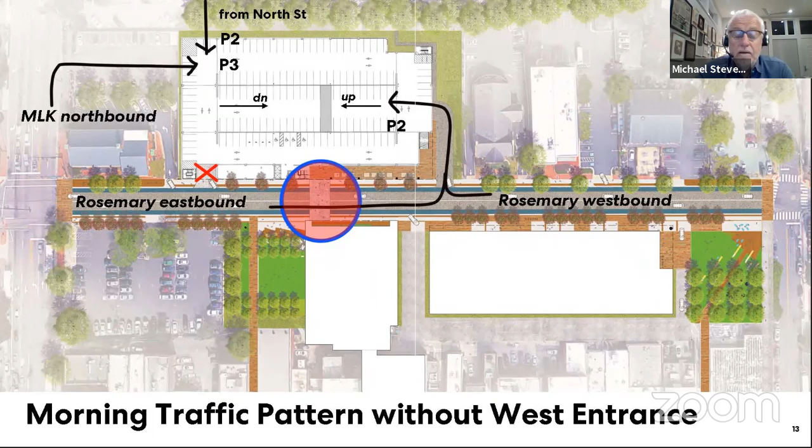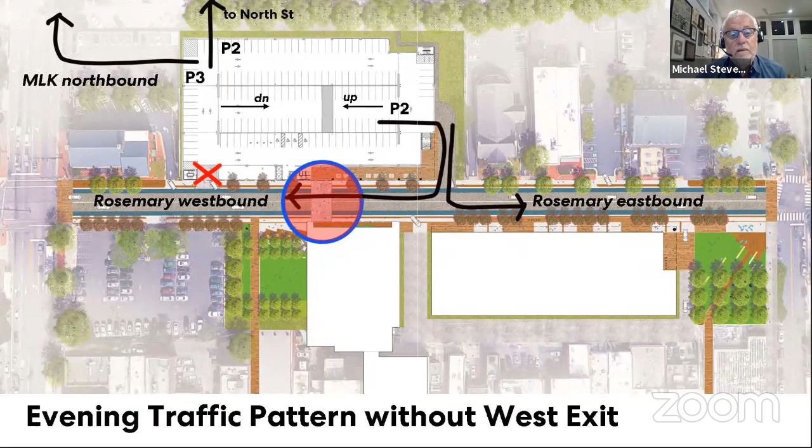And so then if we close the Rosemary West exit, all that traffic needing to go westbound on Rosemary can't go out on Columbia because they can't go left. They're all going to have to go out of Rosemary East and then double back and drive in front of the retail porch and across the pedestrian crosswalk. So again, we think that is not as advantageous as keeping the west exit. Okay, so that's our discussion on the traffic.

Just to reiterate the cost impact, it's a little counterintuitive, but office structural needs require floor loading of about 80 pounds a square foot, while parking is only about 40 pounds a square foot. So we have to do an upgraded structure there, plus additional code requirements like fire separation, air conditioning, and interior finishes. That generates a cost delta of about $130 to $150 a square foot going from parking to office. For that space, 1,400 square feet, that's about $180,000 to $200,000 for parking management. I know that question came up earlier.

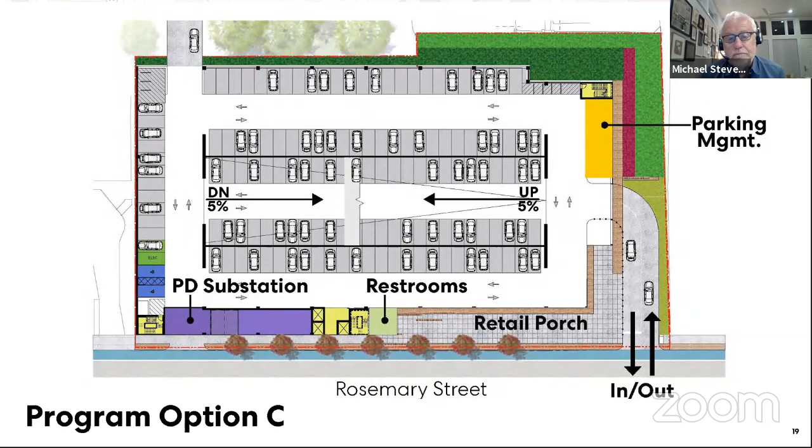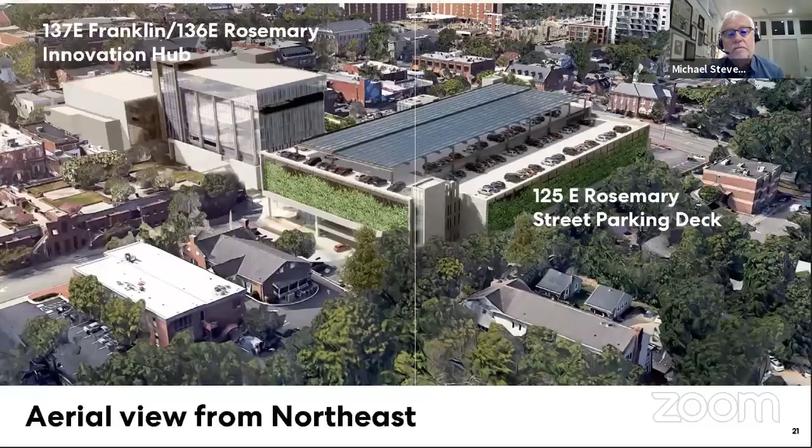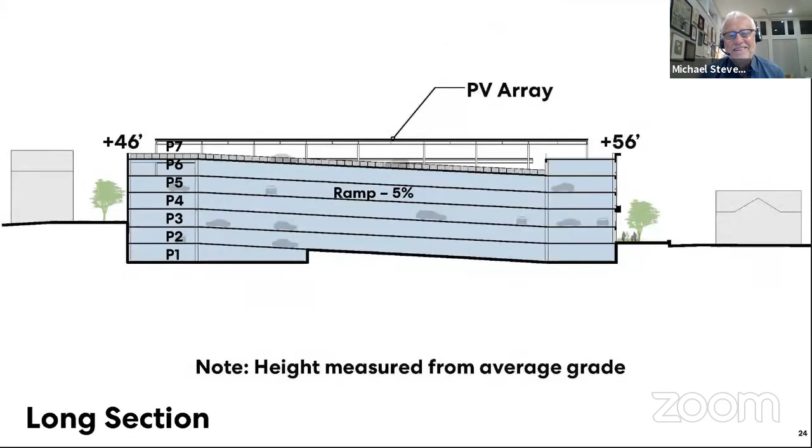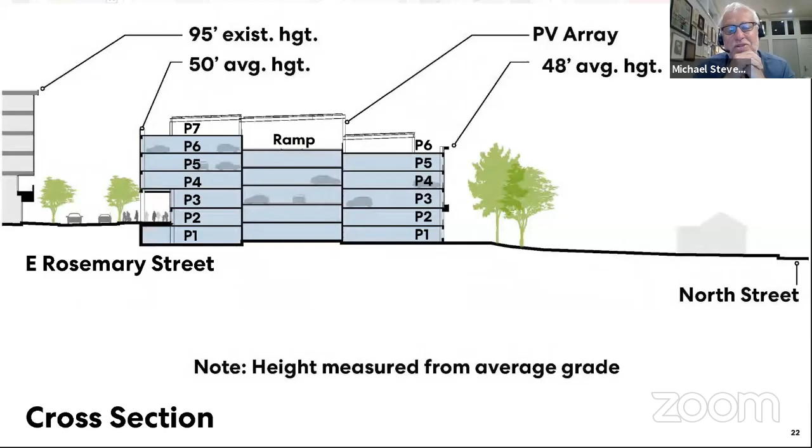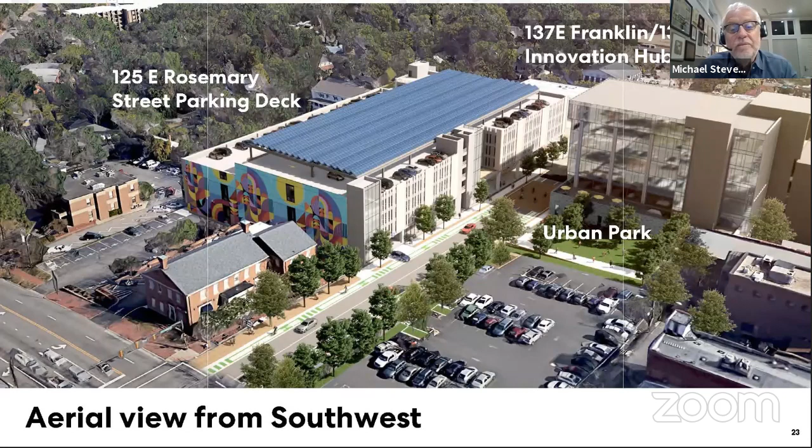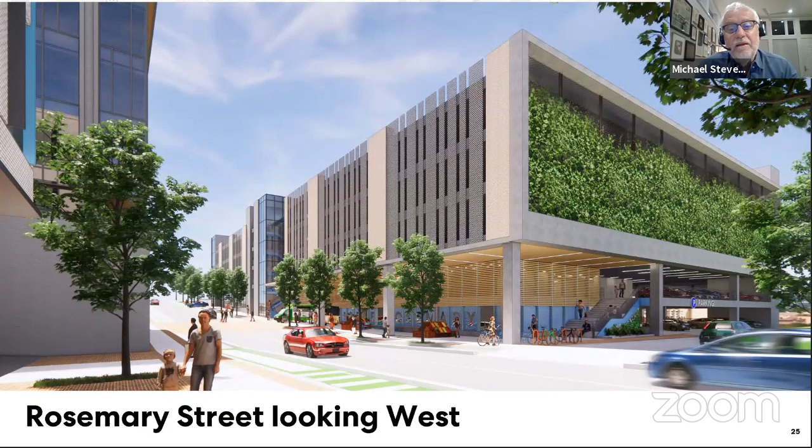We've talked about this. Next please. There was a question about whether you would see the PV arrays, so we created these views and checked the sight lines. The way we're showing them on those aerial views, they're actually not visible from sidewalk level across the street. I know there was a comment in one of our reviews that maybe they'd look kind of cool as an eyebrow, which they might, but the way we have them positioned, you actually would not see them.

Next. Same thing from this angle—because they're set back 18 feet from the wall plane, they're not visible. Next, please.

So actually, this is the only place you can get a peek of them—in that gap right by the stair, which is enclosed in glass. You can just see up there in the gray, that's the edge of the PV array. So you could get a glimpse of them there, but for the most part, they're not visible from the street. Next, please.

Then we were asked to show a view from North Street. Because of the dense tree cover on North Street, this is the only spot we could find where we could get a clear view up to the north facade. This would be at the drive entrance we were showing on the northwest corner, and there you'd get a view of it. This shows the height of that to scale as it would look from North Street. Next, please.

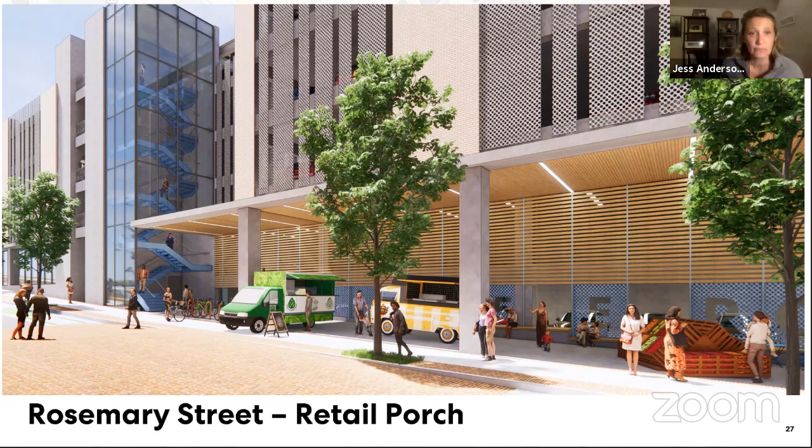Also, if we could back up to the perspective that shows the corner - one more back. This is showing on the corner how the idea of wrapping the porch adds to the interest at the street level. It looks like there's a kind of grand stair that leads you up to that second level.

There was a question at the last meeting about what it's like for you inside the building. This is a major entrance that comes up from the porch that leads you into this area that's open to light. If you're parking in there, you'll walk to this area where there's light, then go down the stair into this main space. Any of these attempts to bring circulation together from inside to outside to this hub reinforces the building being plugged into the urban fabric a little bit more.

So how hard would it be to give us several different options in terms of the style or the facade? I understand the majority of the work is around the finances and making sure the traffic works and getting people in and out, so I don't mean to suggest we spend tons of time on this if creating different styles is a big deal. But for me, I look at that material above the wood on floor 3, and that is just - I don't like it, but that doesn't mean other people won't love it.

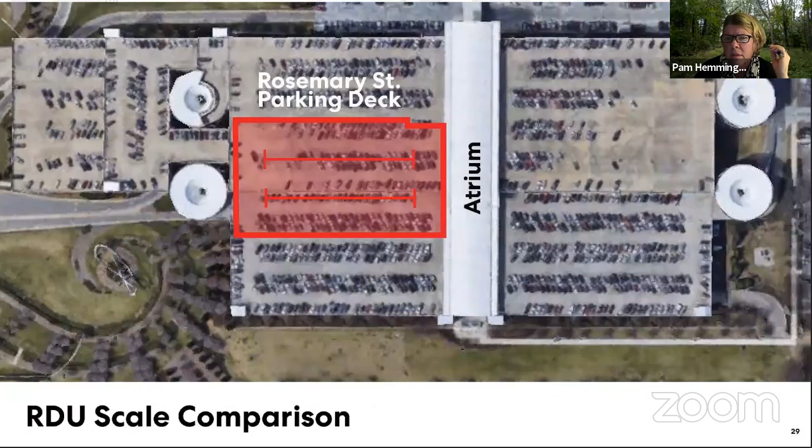I'll throw in my comments. Thank you. Can you hear, yeah, the picture there.

The 28 EV charging stations, that's like 2% of all the spaces. And as we know, the world's going to be changing, and our community really loves EV cars. Is there a way to double that, so at least we're doing 4%, or just the conduit? I know we're not ready to put all those stations in, but is there a way to make another floor of it or something like that? I just think 28 is way too small for an 1,100 space charging parking deck. I don't know what the normal rationale is, but our community has a lot of electric cars, and there's a lot of desire to do that, and it's just going to grow over time.

Next, the trees out front, the spaces you have for them seem pretty, someone else used the word stingy. I'd like the green parts to be noticeable. We did the streetscape on Franklin Street with the raised beds. I know we've had issues, we need to run water to whatever we do there, but can there be something a little bit better than just trees, like it's a desert between each of them, with other scaping? Can they be a little bigger or longer boxes or just something?

Well, that's a good point. There's two things. One is that when we put in too many trees in the renderings, you can't see the building, so it's just for graphic presentation, and sometimes we thin them out just for the renderings. But more importantly, we've had meetings with the fire marshal, and we'd like to space trees about 30 feet on center max to give a nice continuous canopy. But they were asking for a larger spacing so they can get their equipment up in between them. I agree with you, I'd rather see a closer spacing of trees with a nice canopy. I don't know the fire marshal's exact requirement, but we're going to have to find a reasonable point of agreement there.